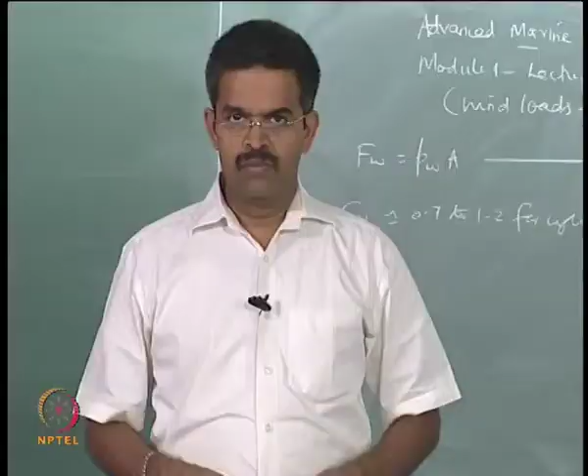We will continue to talk about wind force estimate on marine structures. In equation 2, the wind force normal to the surface can be computed by pW A, where A is the projected area orthogonal to the wind flow direction, and PW is the pressure coefficient computed from equation 1. The coefficient of pressure can vary from 0.7 to 1.2 for cylindrical members.

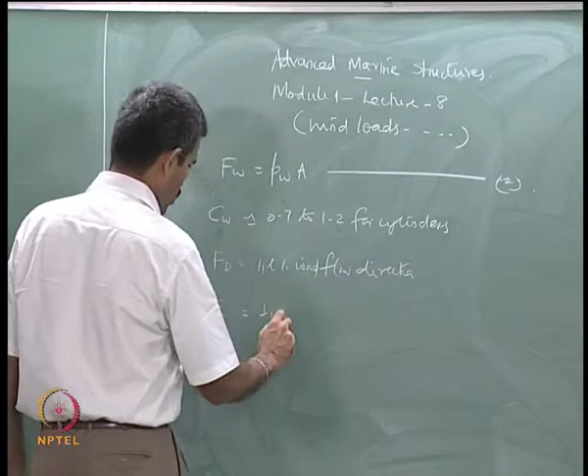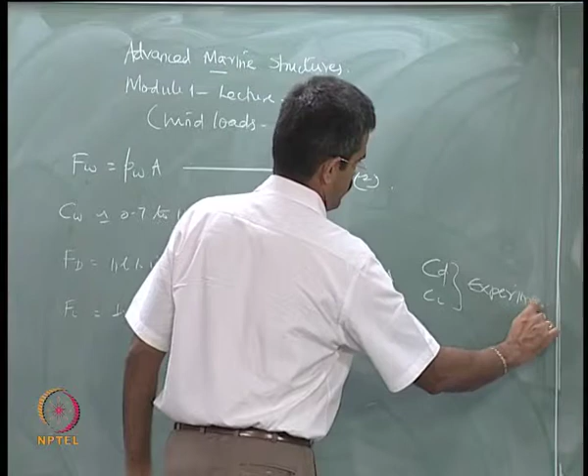Wind will generate two kinds of forces: the drag force and the lift force. One is parallel to the wind flow direction, the other is normal to the wind flow direction. The drag force is half rho CD Vz square of projected area, and the lift force is half rho CL Vz square of projected area. The only difference is the lift and drag coefficients, CD and CL, which can be computed based on experimental studies, essentially wind tunnel testing, which is generally done to compute these values correctly.

This leads to what we call the acceptable wind spectrum, as we saw the load spectrum for aerodynamic loading. The acceptable wind spectrum commonly followed in engineering practice for design of marine structures is the 1/7 power law, which says Vz is given by V10 times (Z/10) to the power 1/7, equation number 3, where V10 is the mean wind speed at 10 meters above the mean sea level. Z may be any height above the mean sea level where you want to find the velocity. Since the exponential power here is 1/7, this law is called the 1/7 power law.

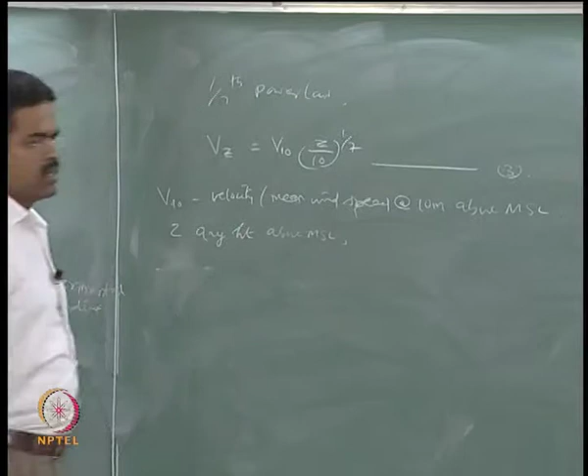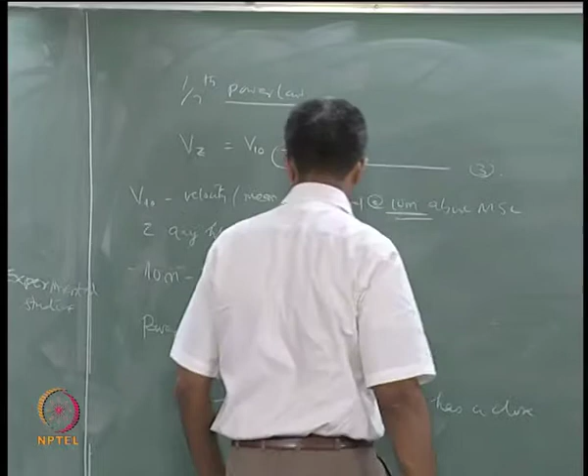This 10 meters is what we call the reference height. Now there is a very important comment made on the power law in the literature. The power law used as a wind spectrum for computing design forces on marine structures is basically an empirical relationship, and this holds good because it has a close agreement with the experimental findings. So this law is favorably being recommended by engineers for finding out the wind forces on members of marine structures.

As I said, wind has got two components, the mean wind and the gust wind. This is the mean component, this is the gust component. This is static, this is dynamic in nature; this is fixed, this is fluctuating. So far we have been handling the mean component, which can be computed using the power law. Now how will you handle the gust component? Well, that is an important contribution.

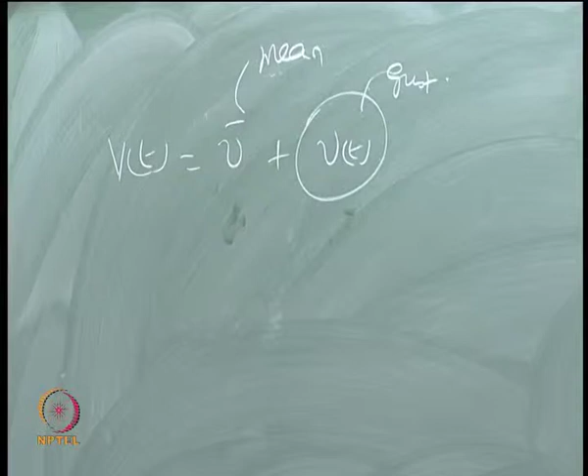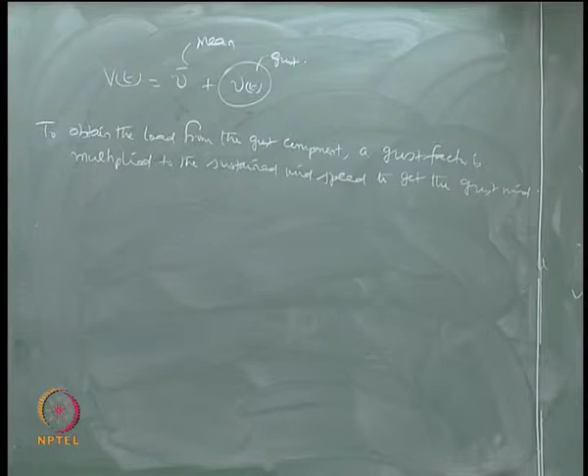To find the load from the gust component, a gust factor is multiplied to the sustained wind speed to get the gust wind. The average gust factor, which I call Fg, as seen from the literature, varies from 1.35 to 1.45. Most importantly, the variation of the gust factor along the height is negligible, that is very important. The mean wind component along the height is predominantly one of the varying parameters, it keeps on varying, but the gust component does not vary with height; it is negligible.

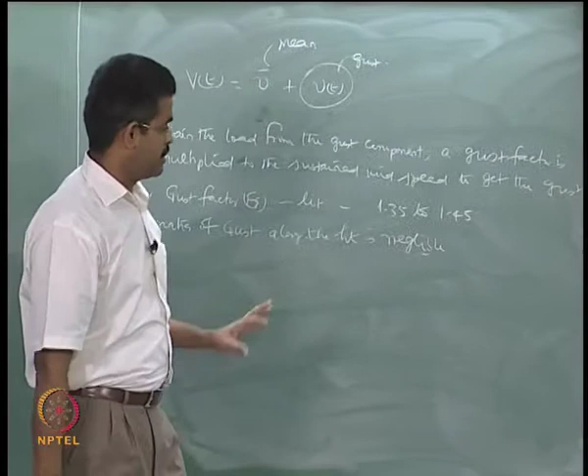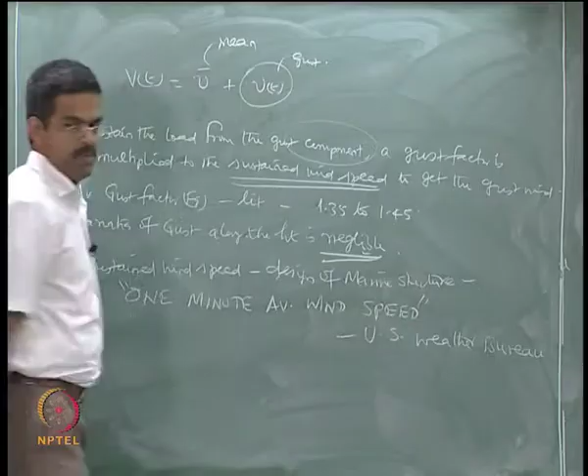Now the question comes: the gust component depends on the sustained wind speed. What should be the sustained wind speed taken for marine structures? That is again an argument. Various international codes advise different sustained wind speeds. So the sustained wind speed to be taken for design of marine structures is the 1 minute average wind speed, as recommended by the US Weather Bureau. So one must consider the 1 minute average wind speed—measure the wind speed for an average of a minute and use that as your sustained wind speed to multiply with the gust factor to get the gust wind in a design.

You will also find another important term in the literature which is called fastest mile velocity. Now what is fastest mile velocity? It is nothing but the gust factor multiplied by the sustained wind speed.

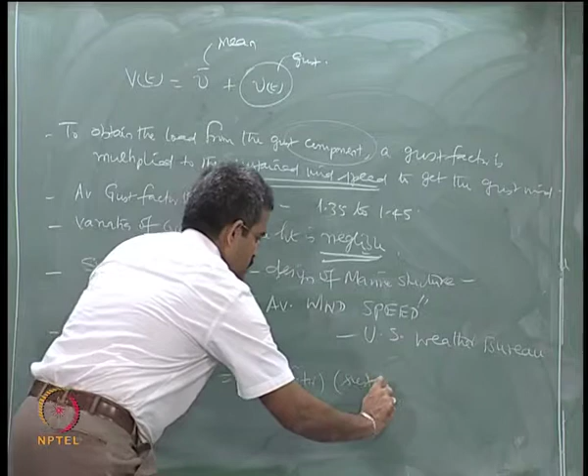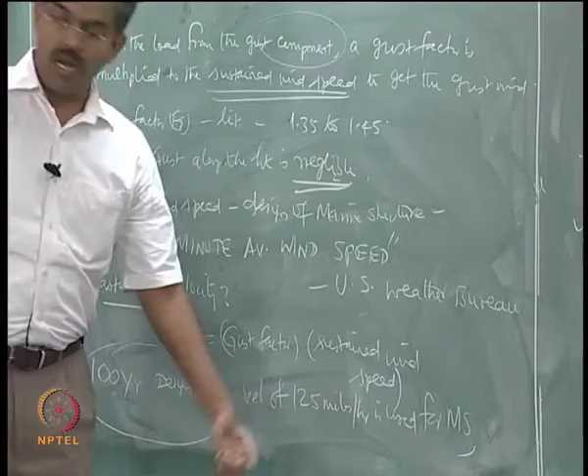Generally a 100-year design wind with a velocity of 125 miles per hour is used for marine structures, that is important. So I use the 100-year design wind speed, sustained wind speed with a velocity of 125 miles per hour to compute my sustained wind speed. What I actually try to say is this: look at the 100-year record, look at the wind velocity blowing at 125 miles per hour. During that scenario, take a 1 minute average of the wind speed and use that value multiplied with the gust factor, given in the literature as it is, which will give you the gust component of your wind velocity or wind force.

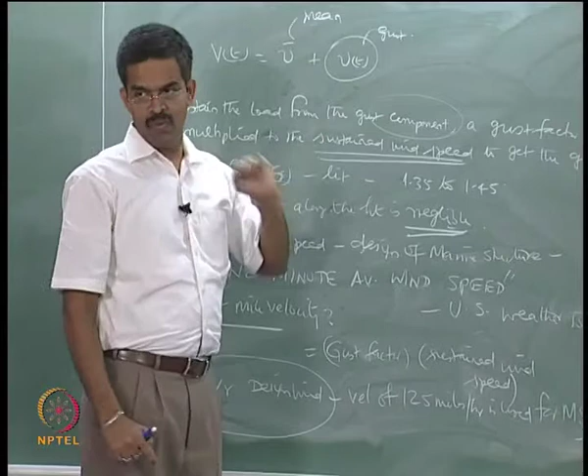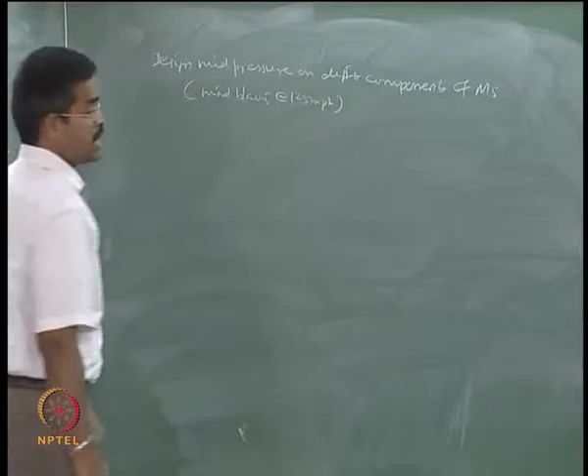Interestingly, the design wind pressure on different components of marine structures, when the wind blows at 125 miles per hour, is available in a tabular form given in the literature. Let us see what that is.

These are the components, this is the design wind pressure. Once you multiply this with the projected area which is orthogonal to the direction, you get the force. The different components are, let us say, flat surface, gusset plates, etc.

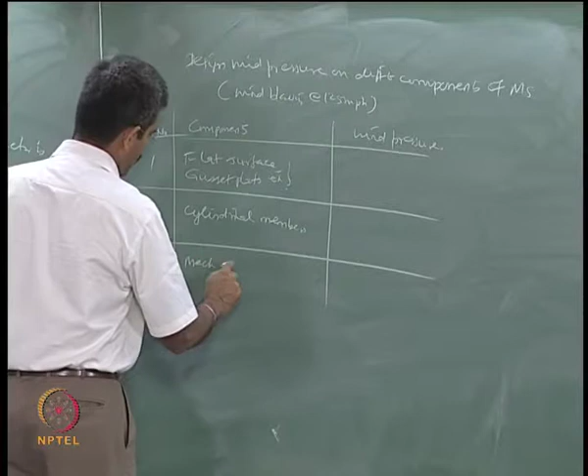Cylindrical members, mechanical equipments on the top side. Some of the mechanical equipments will be cylindrical, so we will treat them as cylindrical only when their length is equal to 4 times the diameter.

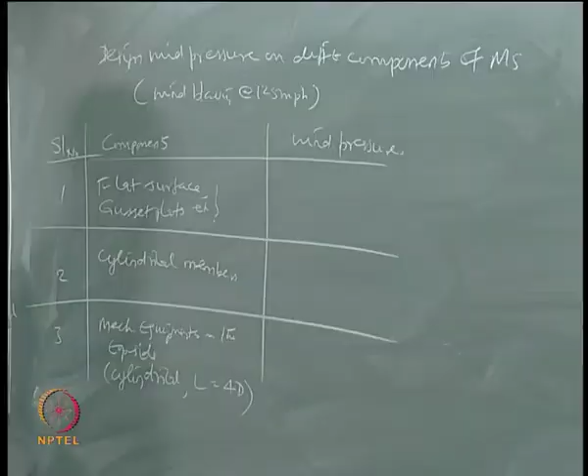In such cases, the recommended wind pressure which can apply onto these surfaces, taken as the design wind pressure for marine structures, are the following: 2.87 kilonewton per square meter, 2.29, 1.44. So if you know the projected area normal to the direction of flow of wind, multiply these values on the surfaces to find out the wind forces on these surfaces respectively for design purpose in marine structures.

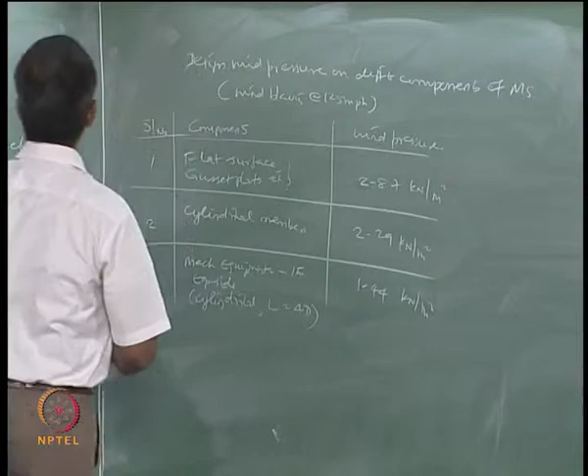Now let us quickly talk about the realization of wind on marine structures. Where is the complexity? It looks as if it is very simple, but there are complexities, because we are seeing both components independently, the mean wind speed and the gust component independently. So far we have been seeing them this way, but as a phenomenon, wind acts with both together.

So let us see what is the wind speed or wind force realization on marine structures, because there are two components. There are some important points.

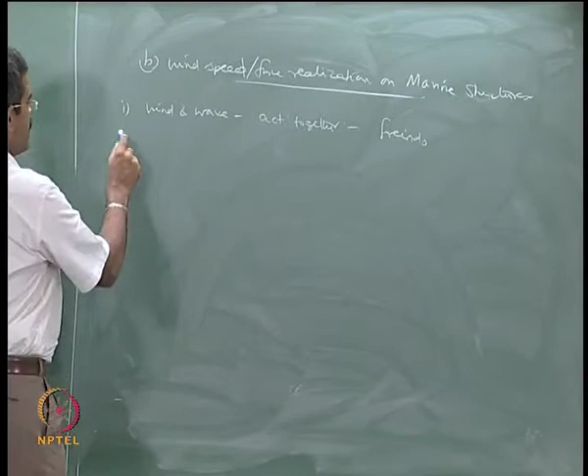Wind and waves generally act together, so we can say they are friends, whereas earthquake and wind do not act together, so we should say they are orthogonal to each other. I mean this with the funny statement saying orthogonal means the product will remain 0.

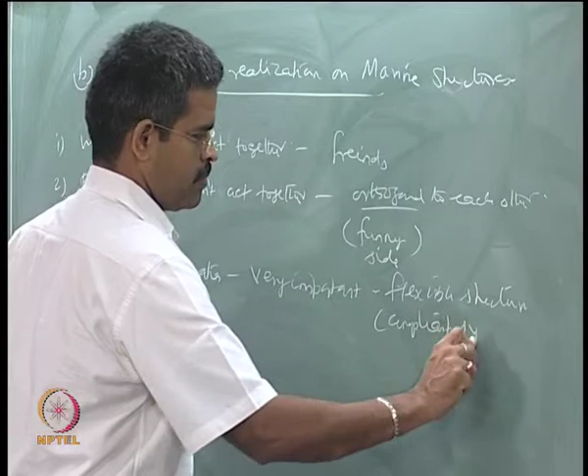Therefore, wind induced vibration becomes very important for flexible structures. I should say compliant systems, because the moment the structure becomes flexible, it will start responding to the wave action or the wind action. I address this as compliant systems in marine structures.

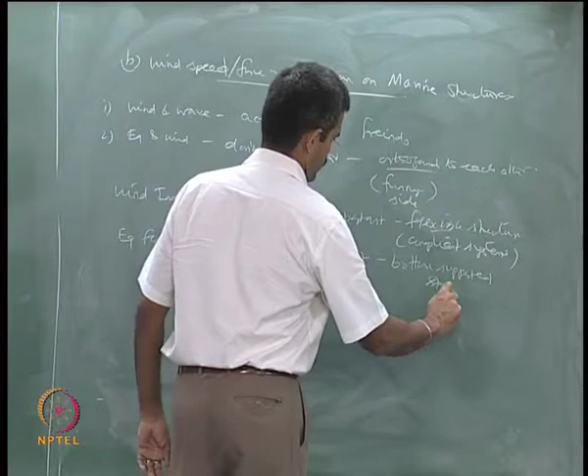Whereas earthquake forces become important in case of fixed structures, but I would say bottom supported structures. You can have many examples like gravity based structure, fixed jacket platform, where earthquake forces become important, whereas wind induced vibration becomes important in case of compliant structures.

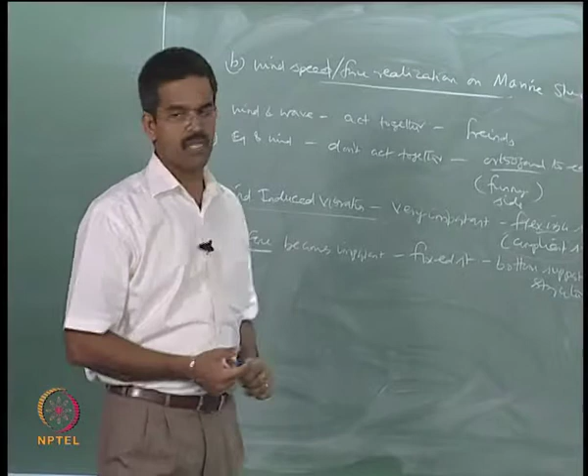Let us quickly see some of the important parameters focused on wind force on structures. We will try to derive the aerodynamic admittance function, which is an intelligent representation of the random process of wind to compute the force on marine structures. There are some factors associated with wind forces on marine structures.

We already know that wind has got two components, the mean wind speed and the gust component. Wind is a low frequency phenomenon. Wave is not, it is not a low frequency phenomenon.

The fluctuating component of the wind force is generally modeled probabilistically, whereas earthquake forces are generally modeled by deterministic analysis.

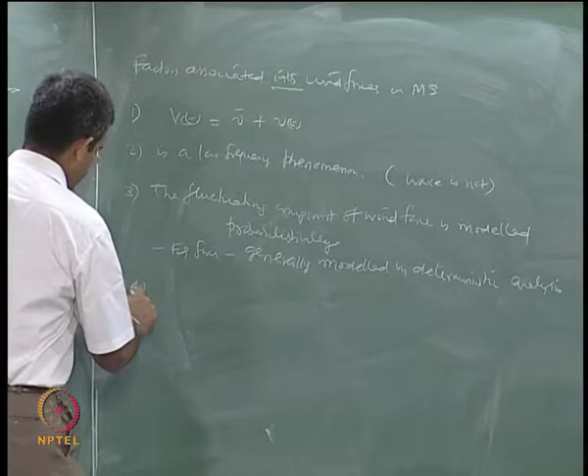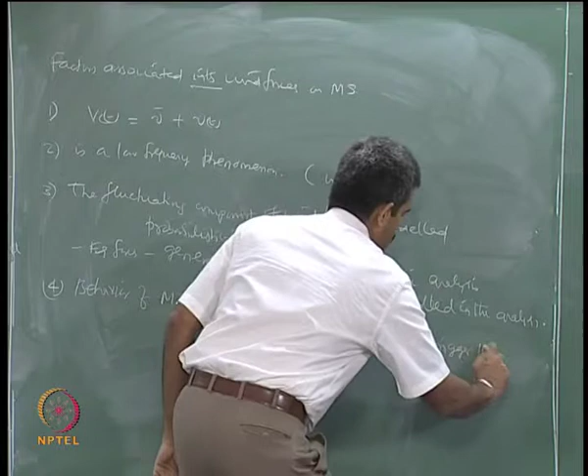So therefore the behavior of marine structures in wind and earthquake are different in terms of two things. One, how they are handled in the analysis, and the way they are handled is different. Two, the way in which they trigger the response. We have just seen that earthquake forces, the way in which they trigger the response, become predominant when the structure is bottom supported.

Wind force will become predominant when the structure is flexible or compliant. So there are two effects of these forces on the behavior: one is by the way they are handled in the analysis, one deterministic, the other probabilistic; the other is depending upon the support given to the structural system, one flexible, the other fixed.

The moment I say probabilistic, wind becomes a random process. It is very difficult to model it as it is in an analysis, because compared to earthquake modeling this becomes more complicated. So how people have intelligently used this mechanism to make it simple is what we are now focusing on.

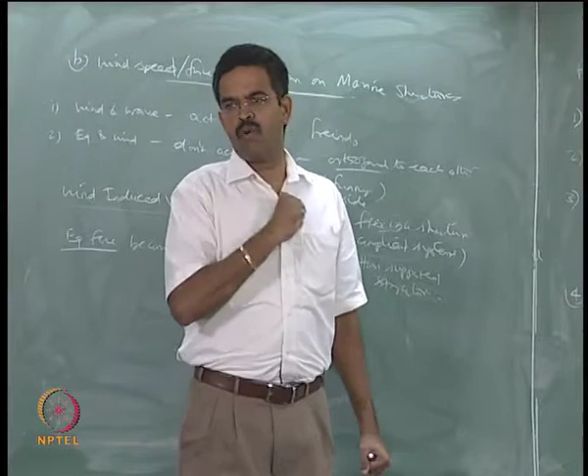Now, the drag forces on members will be caused due to wind, will be caused due to waves. Inertia forces will also be caused due to waves. Inertia forces will also arise from earthquakes. What this means is that earthquake does not produce drag force.

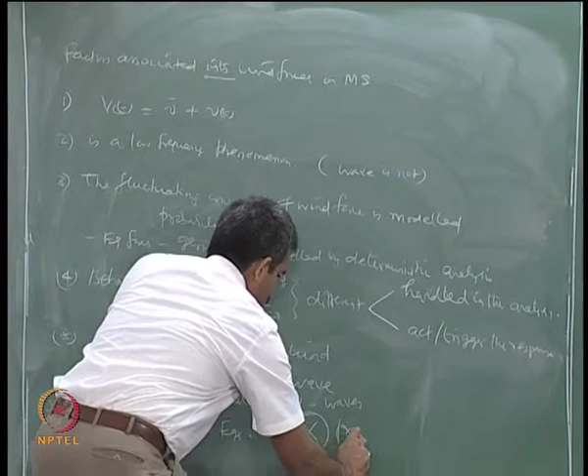So what does it mean? This statement implies a very important confirmation to me, that vibrations induced on structures because of wind plus wave, and wave plus earthquake, are different.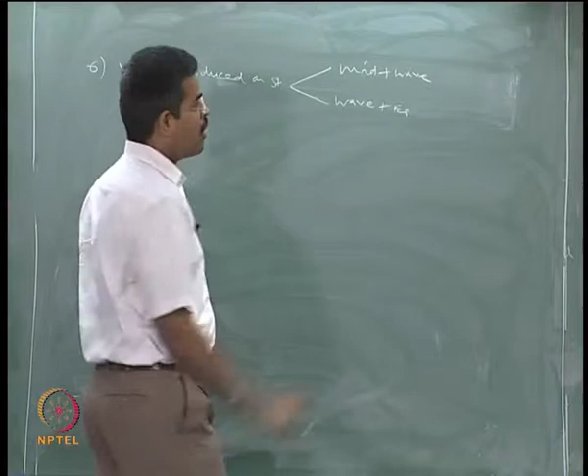Now from this level onwards there has been a very serious idealization done by the literature. People said wind forces on marine structures are generally modeled, considered, or handled as quasi static analysis. That is what many, and I should say most, of the codes do.

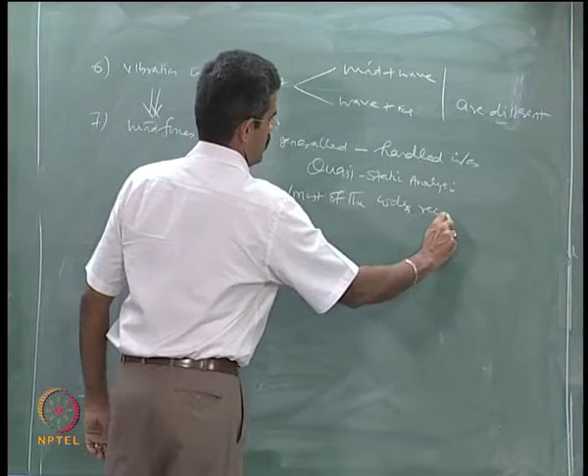Additionally, when you have very slender members or slender structures as a whole, wind induced vibration is critical. This is also true for flexible structures, which in my case I will call compliant structures.

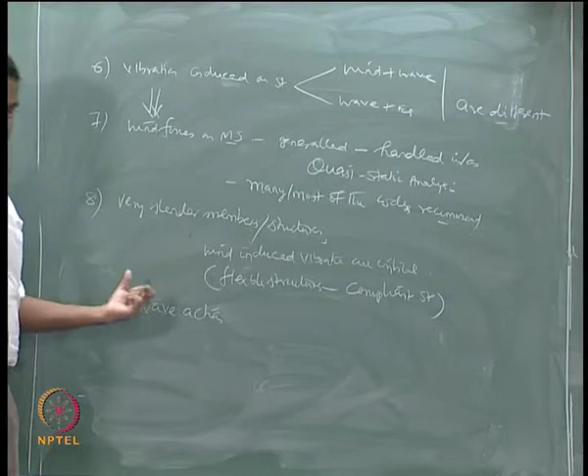Now, if we handle the same manner for wave action, this is for the wind action. Talk about wave action, there is a possibility that they may get cancelled. How? Look at the Morison equation, look at the relative velocity term. If the structural velocity is phenomenally high in comparison to the wave velocity of wave water particle kinematics, then the net velocity to which a structure will respond to will become lower.

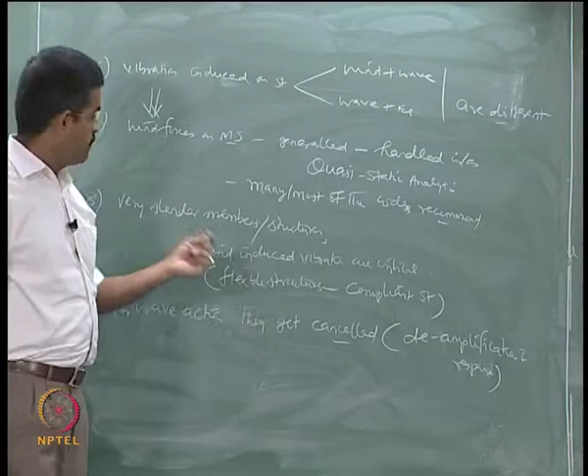So, there is a cancellation effect, but that does not happen in wind. This is what we call as de-amplification of response. This can take place in flexible structures in case of wave action, whereas in wind action, when the structure becomes flexible, the wind induced vibration will become more critical. Is that clear? So, it is very dangerous, or you must look at that with more care compared to that of wave action.

That is what you are trying to say by the point number 8. These are some of the important critical factors which you must remember before you start estimating the wind forces on marine structures. Very simple, it has got two components, mean and gust component. We have looked upon them independently in the previous discussions. Wind is a low frequency phenomena, wave is not a low frequency phenomena.

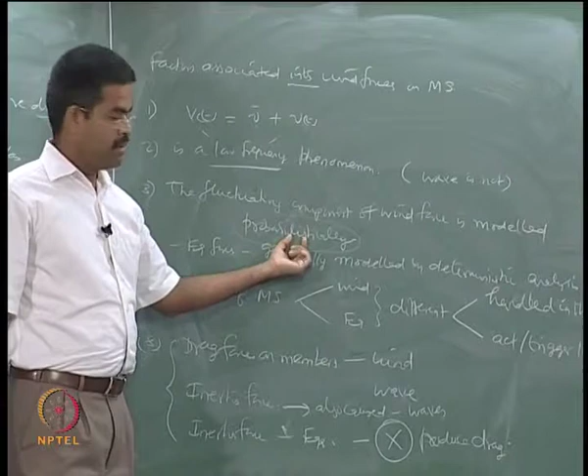The fluctuating component of wind force is handled in the analysis or in the design using a probabilistic technique, whereas unlike in earthquake forces we do deterministic methods. So, the behavior of marine structures under these kinds of forces, that is wave, wind and earthquake, they are different in many forms, many manner. One, the way in which they are handled in the analysis. Two, depending upon what force will trigger what kind of structure is also important.

So, with this context, look at this point. If you have a very slender structure or slender member in a structure, we all understand what is slender member. The length of the structure is very, very long compared to the cross sectional dimension, therefore, the radius of gyration becomes very small in that specific axis of bending, therefore, structure will start inducing vibration on its own even under small magnitude of forces of lateral action. That is what we call as slender members, or you have got a slender structure.

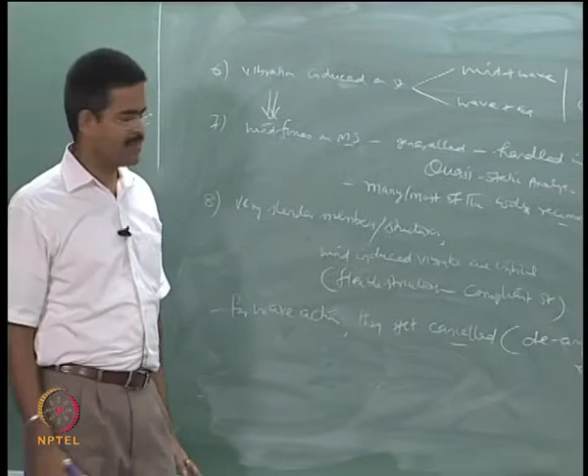In that case, considering wind, it is very critical because it can induce vibration, it is called wind induced vibration, whereas for waves are concerned, they have an action of, they have a category or capacity of even de-amplifying them, they get cancelled. So, they behave differently, that is what we put here. And interestingly, wind and wave both can cause drag forces, whereas earthquake cannot. Wave and earthquake can cause inertia forces, wind cannot.

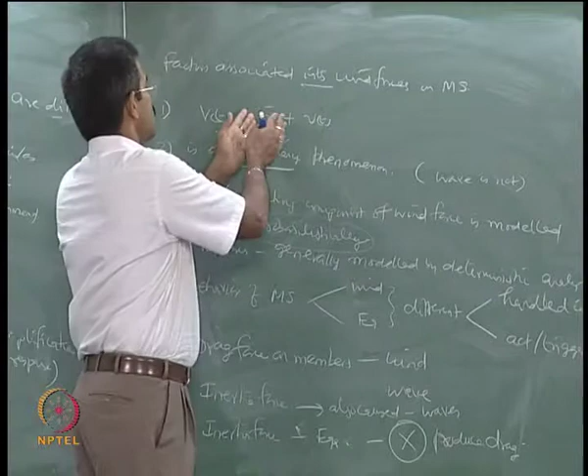So, let us categorically understand before we estimate this. Now, the question is how this fluctuating component which is probabilistic modeled is handled along with the mean component in the force calculation. That is what we are looking at now. Okay, so I need a function which can transform the fluctuating component to a static component to make it easy to handle in my analysis. That job is done using aerodynamic admittance function.

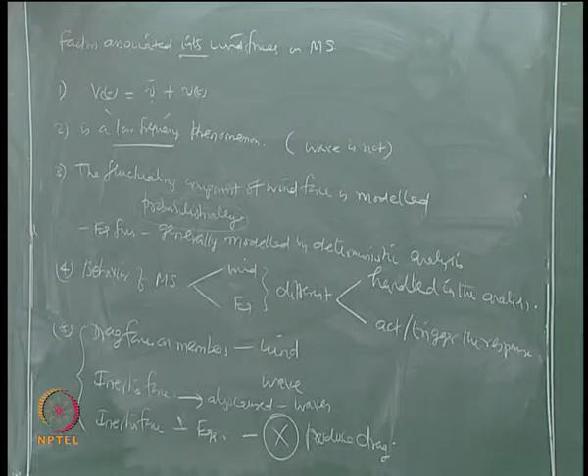Now let us say I want to consider wind as a dynamic process. If you want to consider wind as a dynamic process, then what are those factors which are important? To qualify wind as a dynamic process.

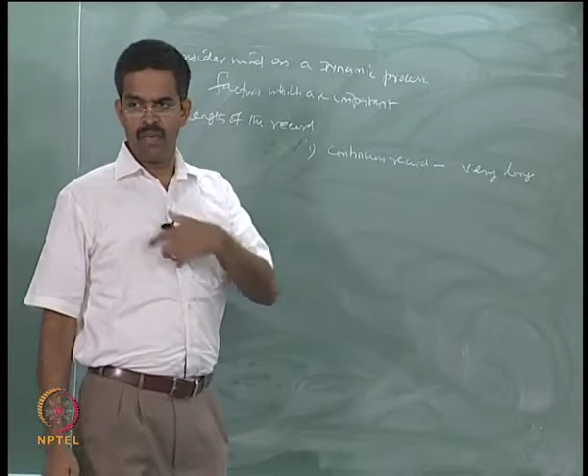1. Length of the record. How long is your record? There are many ways of observing wind forces or wind pressure on any body. One, you can have a continuous recording. So, the record length can be very long. For example, let us say throughout the year, throughout the day you got many number of records.

So, the record length can be very long. The second process can be you can record intermittently, that is every 1 hour interval you record, let us say 8, 9, 10 am, 11, 12, like every 1 hour interval you record, that is called intermittent recording. The third can be you keep on monitoring the wind velocity. If the value exceeds any threshold value,

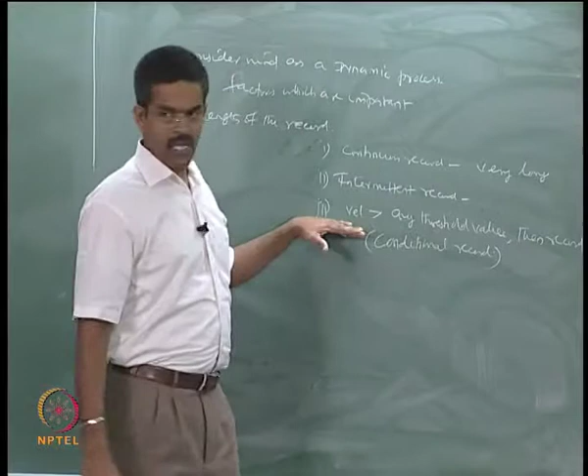then record it. It is called conditional recording. So, keep on monitoring it. If the value exceeds any threshold value, maybe 30 miles per hour, 100 miles per hour, the threshold value is fixed by the code. If your velocity during the day, during the year, during the month, if it exceeds, one mark is given. So, keep on, that is called conditional record.

Now, very easy. If you got a long record, the average will be very low, is it not? The denominator is higher. If you got an intermittent record, the average will be high. So, depending upon the process of the length of the record, you will land up in a variation. You can say my wind velocity is higher, one can say wind velocity is lower, depending upon by what method you have recorded it. That is what we call as length of record.

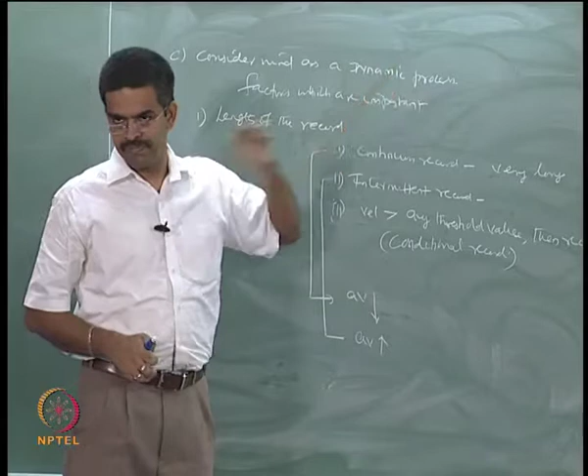All these are dynamic in nature because all these are varying with time. Now, the second aspect is averaging time. It is actually the time at which the record is averaged.

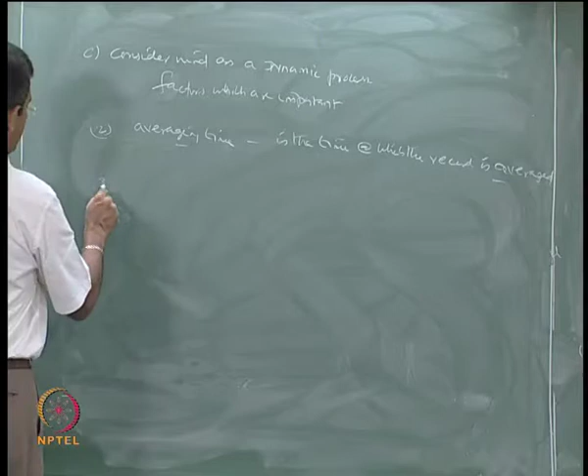Now, thirdly, the wind spectrum becomes an input for the analysis. So, the dynamic component or the fluctuating component should be also considered.

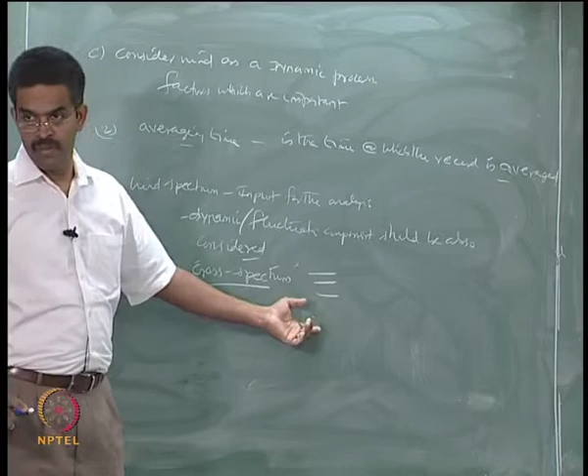Strictly speaking, in probabilistic modeling, this kind of component can be considered using what we call cross spectrum. Equivalently, this can be considered by deploying a new function called aerodynamic admittance function.

Now the fundamental question comes, before we understand what this function is: what would be the advantage of using an aerodynamic admittance function in place of a cross spectrum or in place of a fluctuating component?

There are two advantages in this. A, the foremost advantage is you can bypass the rigorous random process.

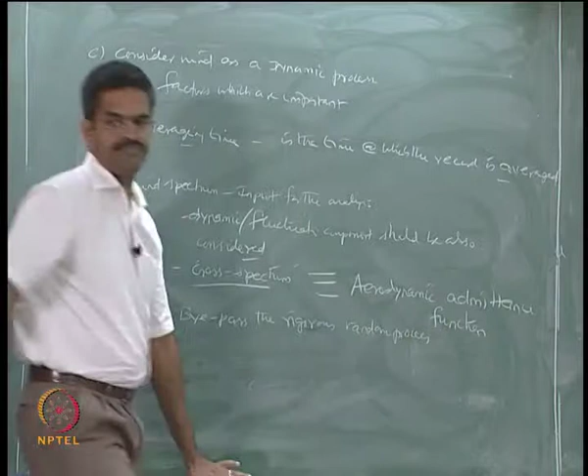Two, the aerodynamic admittance function can be evaluated using experiments, that is very important. That is, you can always quantify them easily.

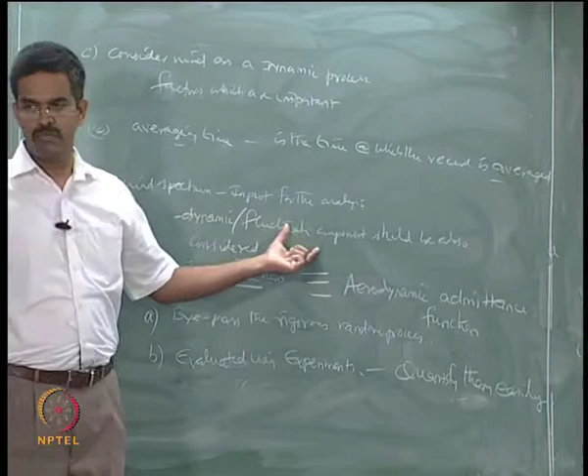So, if you are able to quantify them easily, why should we go for a complicated phenomenon? The aerodynamic admittance function is actually substituted for the fluctuating component because of two reasons: I can easily bypass the rigorous random process involved, and secondly, this function can be evaluated using experimental conduct, that is, in wind tunnel testing we can do this and find out the aerodynamic admittance function for different bodies of different shape, different height, different spatial distances. I can do this easily on any surface of a body.

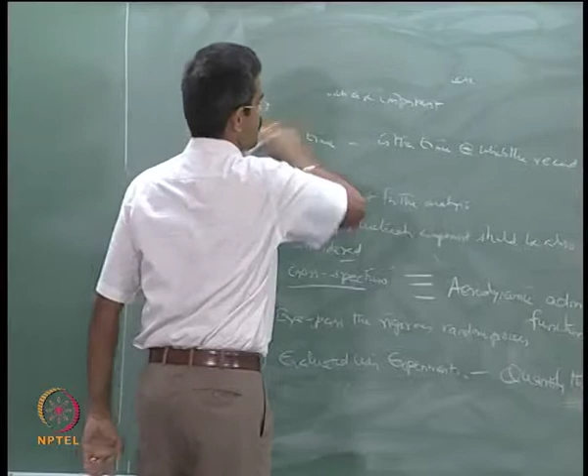So, therefore, now we are inclined to understand how this function looks like, how it is plotted, how it is being used.

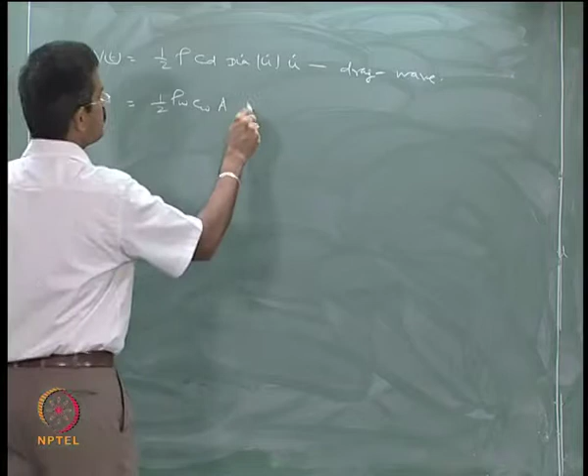Let us see V of t is equal to half rho Cd dia u dot times u dot. This is for the drag force as far as wave is concerned. Half rho w Cw projected area, V t square, this is for the wind, is it not?

I expand this: half rho Cw A, V plus V of t, the whole square. So the mean velocity, mean wind, and the gust wind. Half rho Cw A, V square plus V of t square plus 2 V bar V of t.

It is very important to note that V bar, the mean wind velocity, is much higher than the gust component. In that situation this square term can be made to 0, we can neglect this.

So I can rewrite this equation, the force due to wind, as half rho Cw A V bar square plus rho w Cw A V bar V of t.

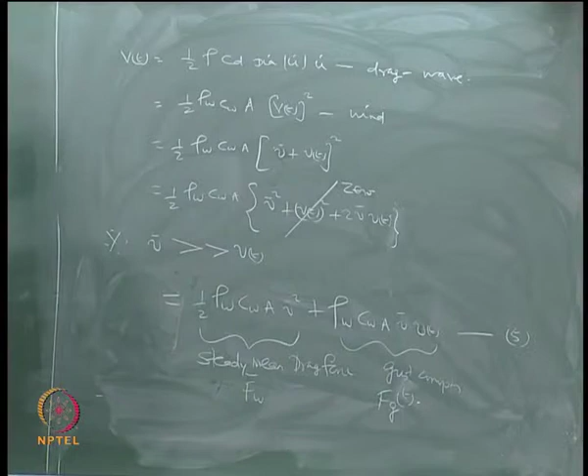So, let us say I have a single degree of freedom system model, when the model has the projected area A, that is, projected area as A.

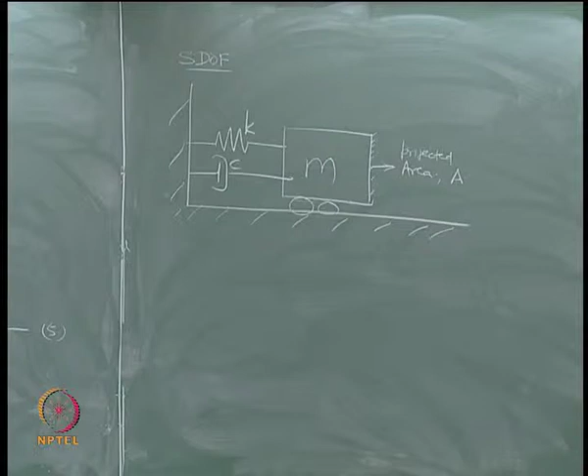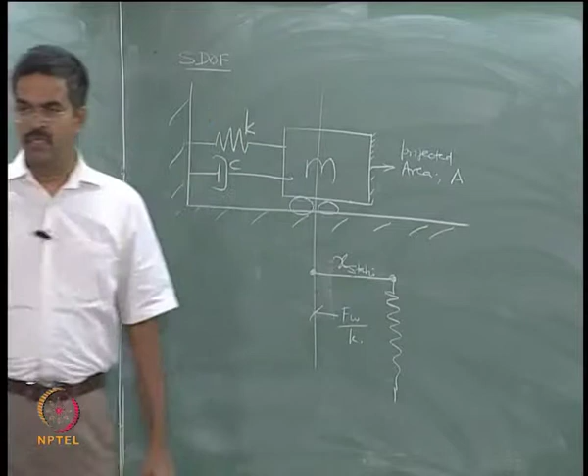Now the response: the response will have a static component, then we will have a dynamic component which will vary within this. The static component can be easily indicated by Fw by K, where Fw is the static mean drag force, which we call the static displacement, x static displacement, plus the vibrating component, which is called the dynamic response.

I call this DFT. One is the static value, the other is the fluctuating component or the dynamic component, which is DFT. Now here there is a need to handle DFT. There is no problem for the static component; we are worried about the dynamic component.

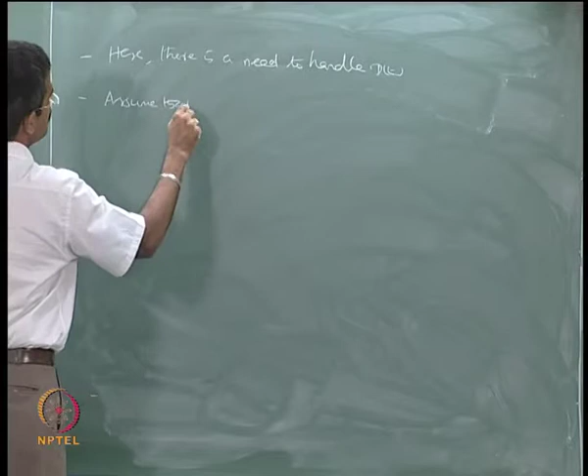Now how is this handled? Assume that the wind force, or wind load, is an ergodic process.

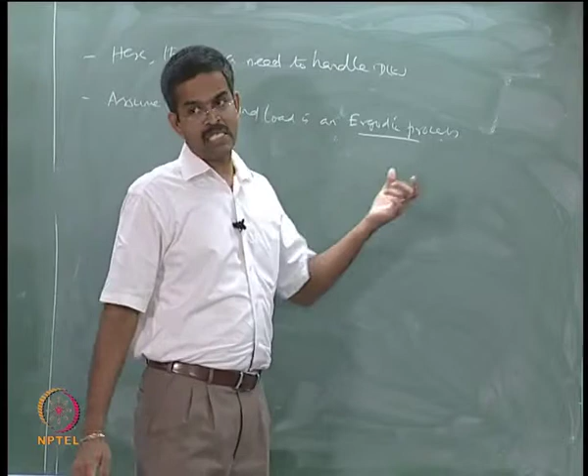We already saw in the last lecture what is meant by ergodic process. Ergodic process is that a single sample from the ensemble of different time histories has a mean value equivalent to the classic value of the whole ensemble. It represents the ensemble in an indirect form. If this is agreed upon, then DFT becomes a single signal process, an arbitrary time history.

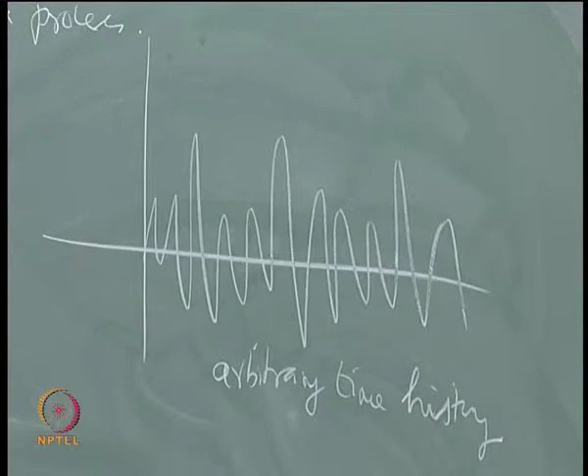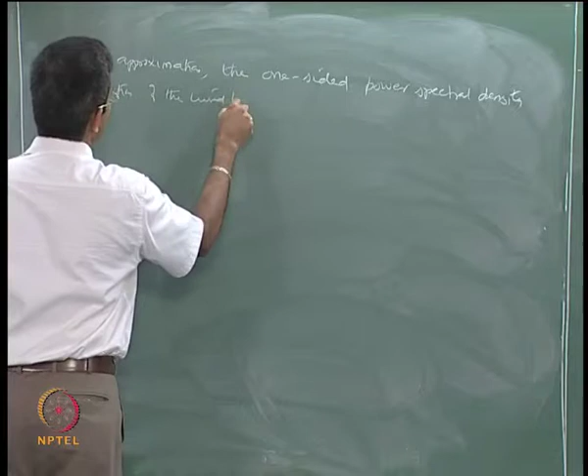Once we agree that this approximation is valid, why is this valid? Because we are assuming the wind load has an ergodic process. Once we agree this process is ergodic with this approximation, the one sided power spectral density function of the wind load is related as below.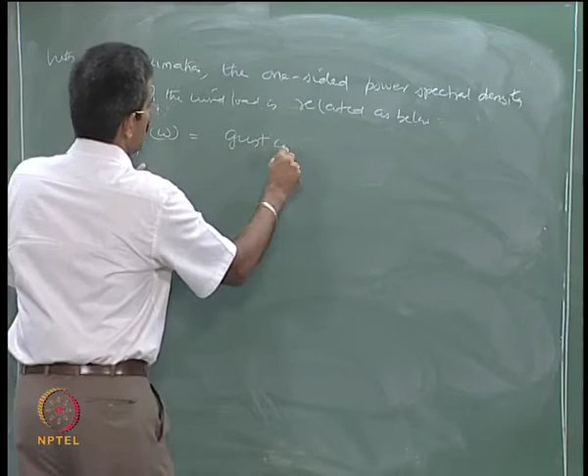The wind force is related to the gust component square of the wind velocity, or the velocity spectrum. This is true when the process is idealized as an ergodic process. We call this equation number 6.

Already in equation 5, if you turn back, you have this gust component ready, that is called Fg. What is the component? The gust component is already seen in equation 5. That tells me it can be related now to rho CD A V bar square. Is that okay?

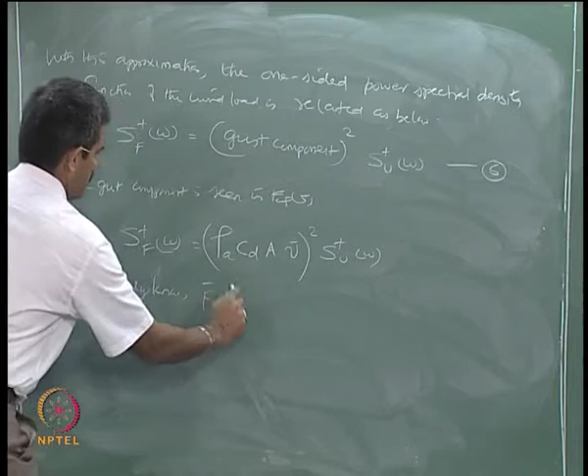that Fw, or F bar W, is half rho V bar square, is it not? So what I want to do is pick up V bar square from this equation and substitute it back here to get my equation modified. If you do that,

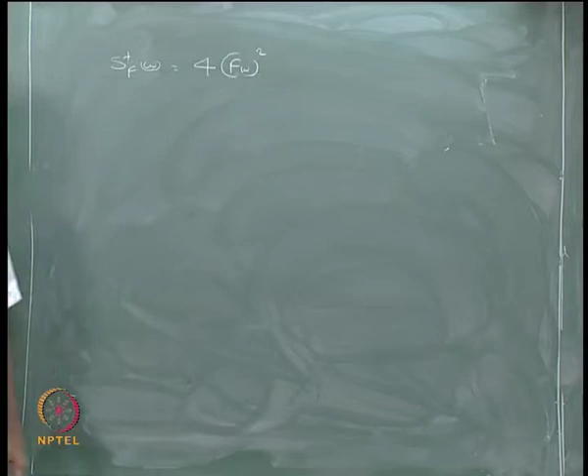my force will become 4 F bar square by V bar square of... is that okay? I call this equation number 7, equation number 8.

Now in case of marine structures, equation 8 can be conveniently modified using the aerodynamic admittance function. We will see how it is modified. First let us see why it is possible.

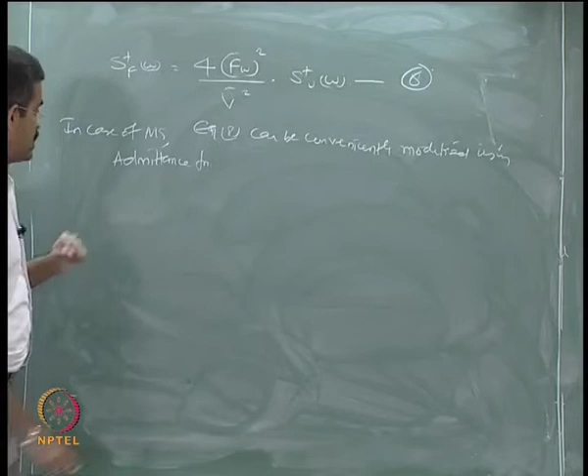It is possible because marine structures have large bluff bodies, and they are massive. Because of these two characteristics, you can always replace or handle equation 8 using an admittance function.

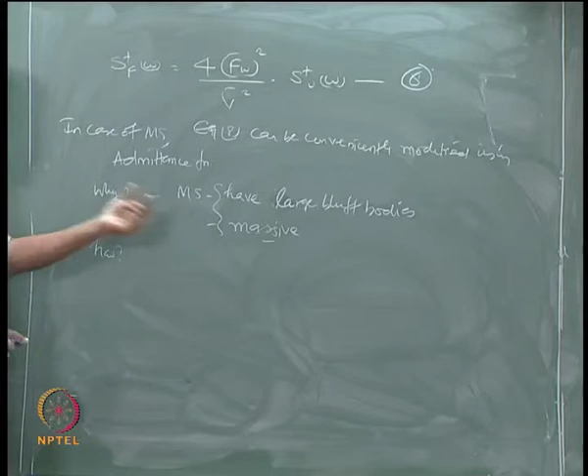Now we will see how. Why I have seen, how I will see now. I will remove this. Now the right hand side of equation 8 is modified

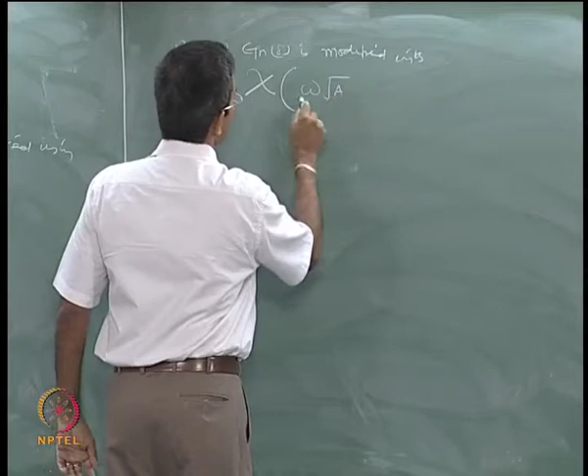with a new function which I call the chi function of... square of this. So now my force spectrum will become 4... this is equation number 9.

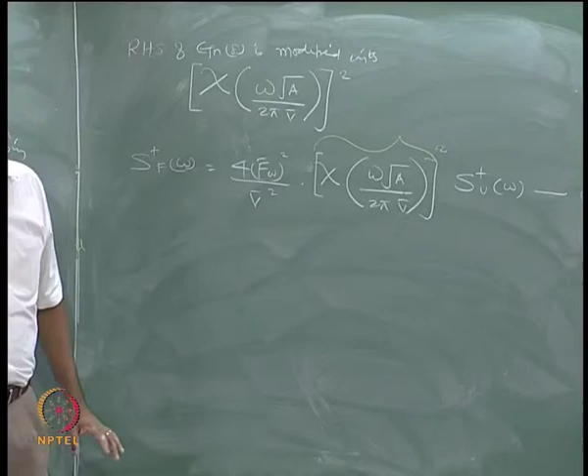Let us quickly see the characteristic of this function. I try to plot this function as a variable with omega, because in this case projected area, wind velocity, or the mean velocity are all fixed values. The only variation is omega. Let us see how the admittance function varies with omega. Try to plot that.

This is omega, this is chi of omega, this value is 1. So this figure implies that when omega root a by 2 pi v bar is 0 — and it cannot be 0 because the area has got a projected area, it cannot be 0, and wind velocity can never be 0 — so the only possibility is omega is 0. In that case my chi of omega root a by 2 pi v bar becomes unity.

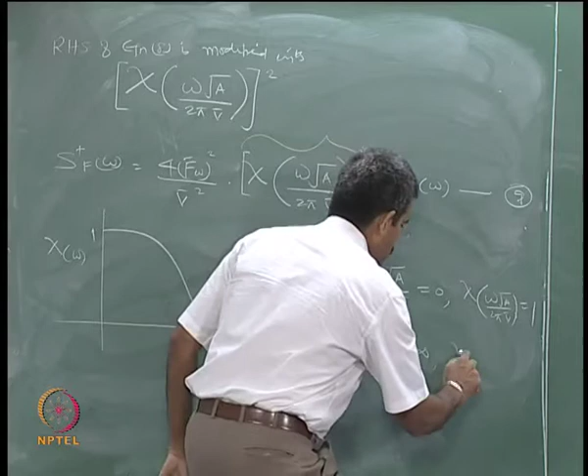When omega root a by 2 pi v bar becomes infinity, that is very large, then my chi value becomes 0. That is what I infer from this figure. That is the behavior of the aerodynamic admittance function as a function of frequency.

Remember, fluctuating means what? Frequency dependent, that is what fluctuating is, is it not? I am handling that here. I am taking care of that fluctuating component with a function which takes care of this, of course with this idealization. Now I can multiply this function directly in the spectrum to give me force output if I know the velocity spectrum. So the fluctuating component, which is a function of frequency, a probabilistic modeling element, is transformed to a methodology like this, comfortable to handle in this case. This is what we call the aerodynamic admittance function.

Now how does literature qualify this function? How can this function be evaluated? Experimentally, you can evaluate this by conducting experiments in wind tunnels. How? If you have a bluff body, work out the projected area, work out the mean velocity attacking the bluff body. For every frequency keep plotting this, and you will be able to get the chi value. But analytically also, literature suggests that chi value can be handled using the equation given by Davenport.

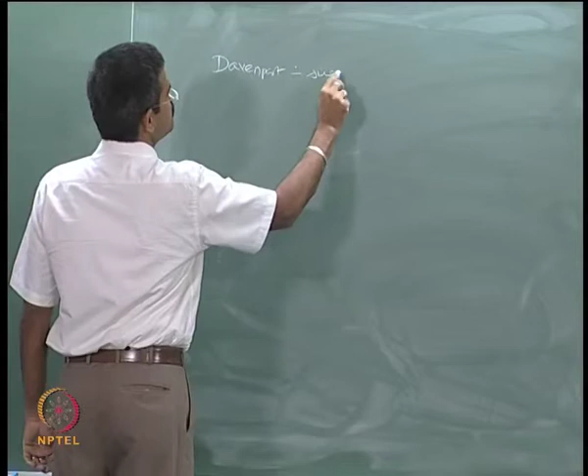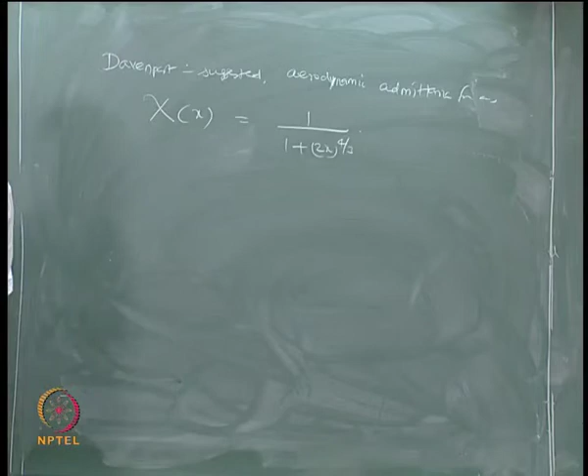Davenport suggested the aerodynamic admittance function as: any value or variable of x can be said as 1 by 1 plus 2x to the power 4 by 3, as given by Davenport, whereas in my case x will be omega root A by 2 pi v bar. I can plot this. I call this equation number 10.

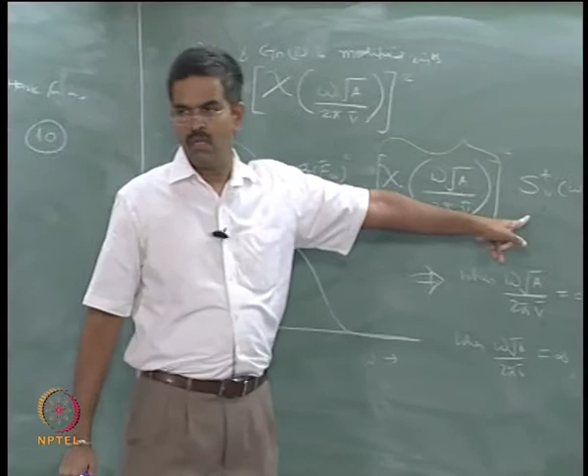So we have understood now in this lecture how to handle wind forces on marine structures, be it flexible, fixed, rigid, or compliant. Wind has got two components: one is the basic wind speed or mean wind speed, the other is the gust or fluctuating component. We have understood how to handle both using the power law and the fluctuating component using the admittance function like this. So one can easily find out the force spectrum on a given member of a marine structure if the velocity spectrum is known, using the aerodynamic admittance function.

This can generally be evaluated using experiments, but analytically also it can be evaluated as suggested by Davenport. These are all suitable and closely applicable only for marine structures. Why is it so? Because they are all averagely worked out at a 1 minute average speed of 125 miles per hour for a 100-year return period, as suggested by the US Weather Bureau.

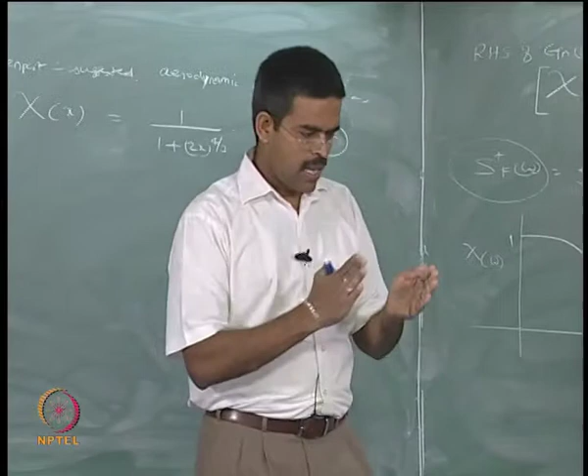That is how we have learnt to handle the hydrodynamic loads on marine structures, how to handle the aerodynamic load on marine structures, how they are different, why they are different, where they are different, and how they are handled. Now, in the next lecture we will talk about ice loads and earthquake loads, and summarize all four components of loads. There are other loads also, but these are the major components acting on marine structures. Once we understand them, we will start designing and understanding the ultimate load design methodology for marine structures, and then move on to plastic design of marine structures. Is it clear? Okay.